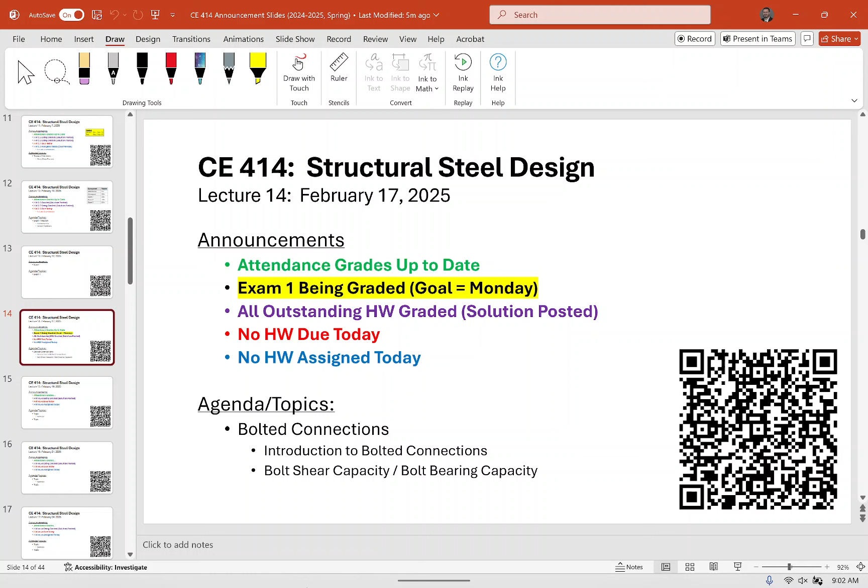So today we're going to talk about bolts. That's our goal for today and for the next 5 lectures: bolted connections. And what we're going to try and review today are 2 limit states related to bolts: bolt shear and bolt bearing.

Let me talk a little bit about bolts, and I brought the bolt assembly with me. I'm going to pass it around if you want to take a look at it. So whenever you see a structural bolt in the field, you will typically see 2 markings on it, okay?

So the first is related to the ASTM specification that it must adhere to. Some very common ones are ASTM A325 and ASTM A490 — those are the 2 most common bolts we use in structural engineering. A490s are a little bit more expensive, but they're also stronger. So the idea is that you pay more per bolt for the 490s, but you can use less of them.

But A325s are probably the most common that you would see in building construction. 490s are probably a little bit more common in bridge construction because of fatigue applications and splices and things like that. These bolts, and the ones being passed around, were made by Nucor, hence the little N logo there.

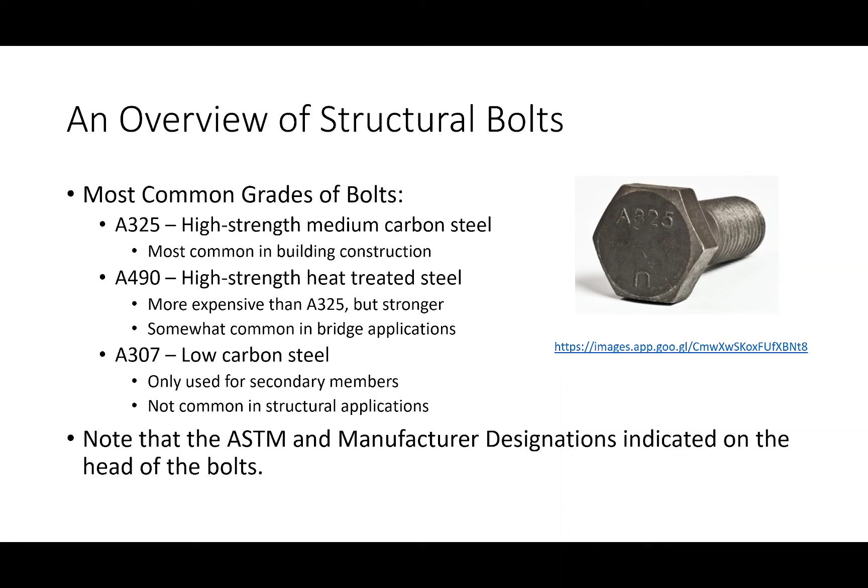Now, I need to preface something right off the bat. These A325 and A490s are the ASTM specifications that those bolts adhere to. I imagine if everybody in here has had CE321, you know what I mean by ASTM specs, because you've used ASTM specs for things like cylinder tests and all that, right? Well, here's the thing: there are other bolts that share the same material characteristics, the same strength properties and things like that, but they follow different ASTM specifications.

So a good example of that are ASTM F1852s. These are what are called twist-off control bolts. We'll talk about this later when we get into the land of slip critical connections, but the idea is that these are really, really common in bridge engineering and in areas where you need to design a slip critical connection. We'll get to what that means here in a bit.

But the idea is that you use this really special wrench, and what it does is it grips both the nut and the bolt on this little splined end. So you don't need, like, think about when you're tightening a bolt, you have a wrench and you're doing that with both hands. You don't need that with a twist-off control bolt, because the single wrench grips both the bolt and the nut all from one end. It twists it, gets the required pretension, and when it hits the required pretension, this little splined end sort of chucks off. So it's great for inspecting bridges in the field and what have you.

Here's the thing: they follow the same strength characteristics, but a different ASTM spec. So what the steel manual does is it breaks these different classes of bolts into groups, okay? The most common ones we'll use are group 120 and group 150. But you'll see in the manual there's also group 144 and group 200 and whatnot.

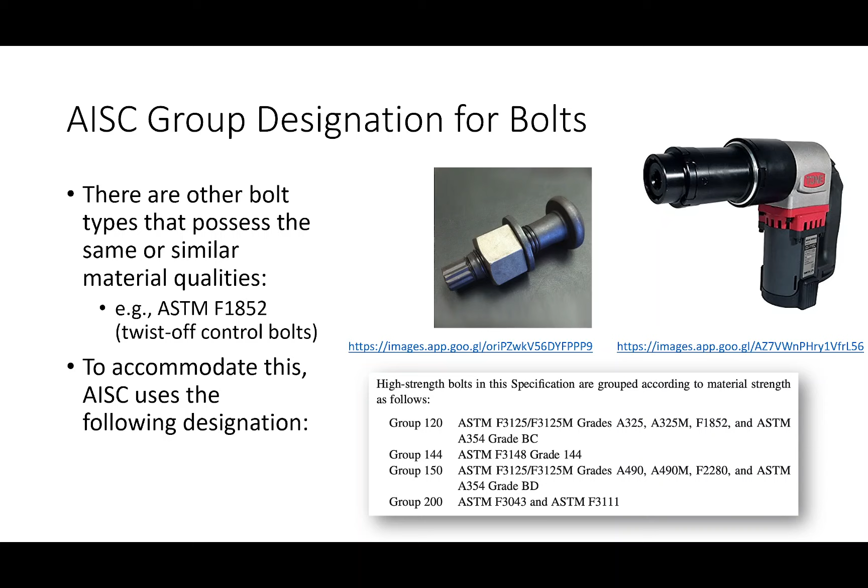Now, in order to explain how we go about analyzing and ultimately designing bolted connections, what we need to do is take a look at what I'll call a bolt assembly. So what I mean by a bolt assembly is we're talking about a bolt, the nut, the washers, and also the two parts that we're joining.

The whole idea behind a bolted connection is you're joining part A to part B. Now, I have a bolt through some plates, and I tighten the nut. What happens to the plates? Here's a plate, bolt goes through them, and I start tightening the bolt. What happens to the plates? They smash together, right?

Once I have this connection together, I can then take this connection and yank on it, apply bending moment, shears, whatever. So what I would propose is that when we're looking at a bolt assembly, we're going to have whatever loads the connection is subjected to that are being applied to it. So we're going to apply some load to it. But we're also going to have, it's kind of hard here on the screen, my apologies, I don't know why it's coming up so faded.

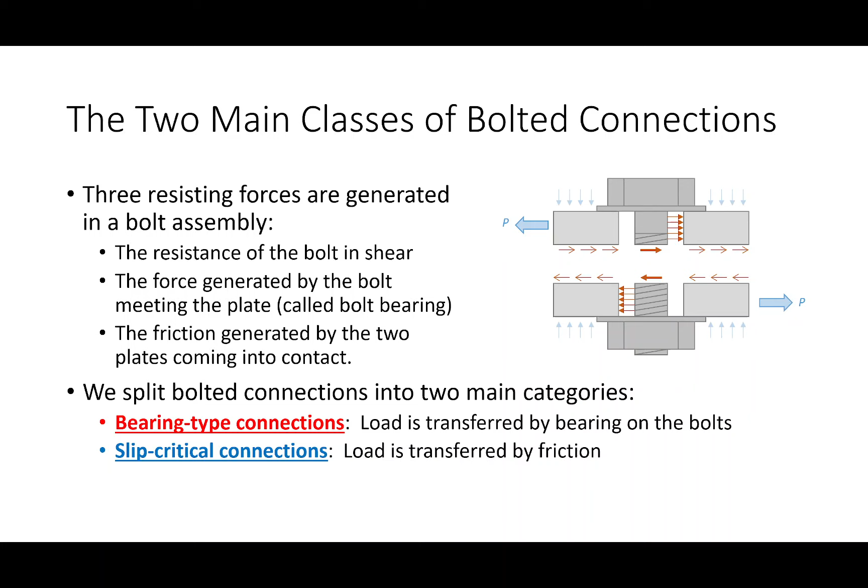So for bearing type connections, we have two different limit states that we really need to assess. We have the failure of the bolt or the failure of the plate. The bolt, in this case, would fail in shear.

The plate can actually fail two different ways, and the best way of describing that is to just show you an image on that a bit later. But for each of these limit states, we're going to have a phi RN. So it's going to be like tension members, where we have a phi PN for gross section yielding and a phi PN for net section fracture. Same idea here: a phi RN for bolt shear, a phi RN for bolt bearing, and we just take the minimum.

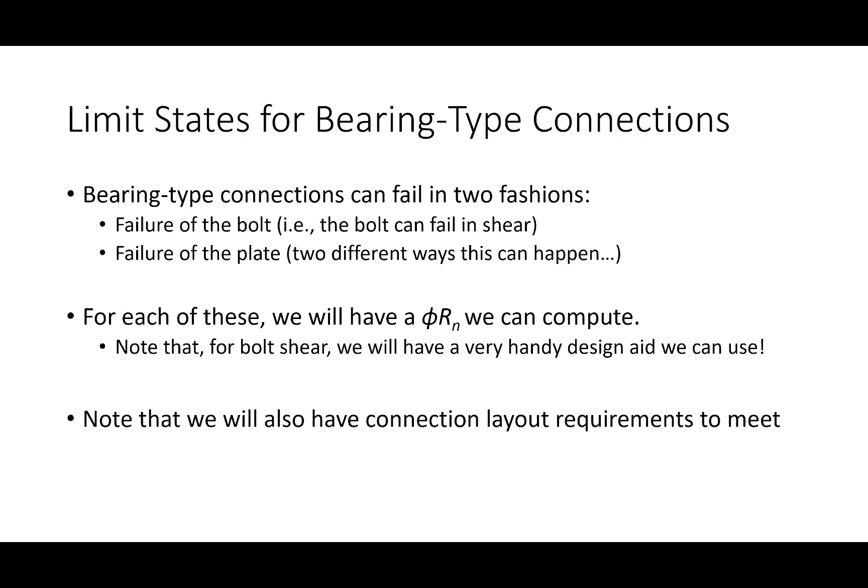Now for bolt shear, we're going to go through the math, but we've got a really handy guide in the manual that's going to make our life a lot easier on that. The other thing, and we're not going to talk about this today, is that we also have connection layout requirements that we have to adhere to. That'll be a topic of discussion for Wednesday, if we're here.

Okay, so let's talk about bolt shear capacity first. What we're concerning ourselves with right now: here's a bolt, and we're loading it in shear. How much load until we just shear the bolt in half? How do we get there?

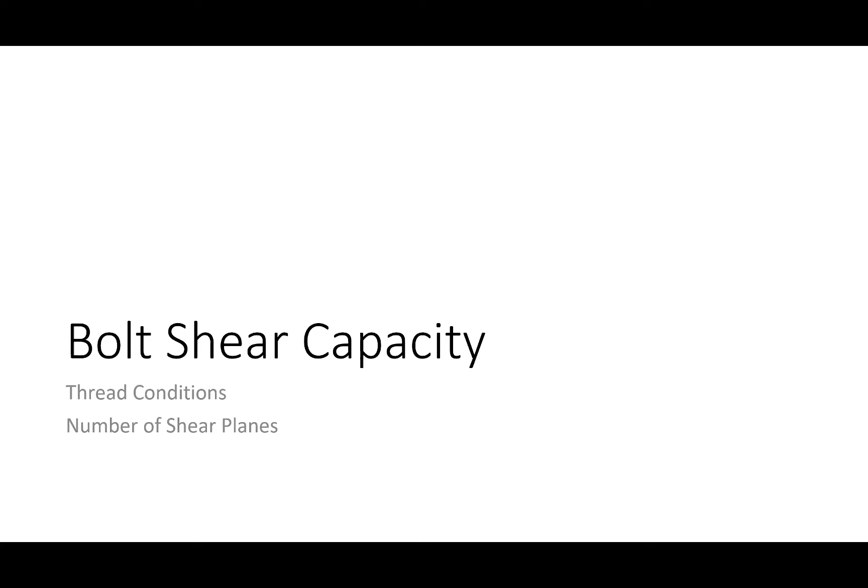We're going to come up with a pretty easy equation to calculate that, but what's going to get tricky are the thread conditions and the number of shear planes. So let's deal with the simple part first. How do we calculate the shear strength of a bolt? Well, we take the nominal shear stress and multiply it by the area of the bolt. By the area, we're talking about the nominal unthreaded area, or the area of the bolt, so pi over 4 d squared.

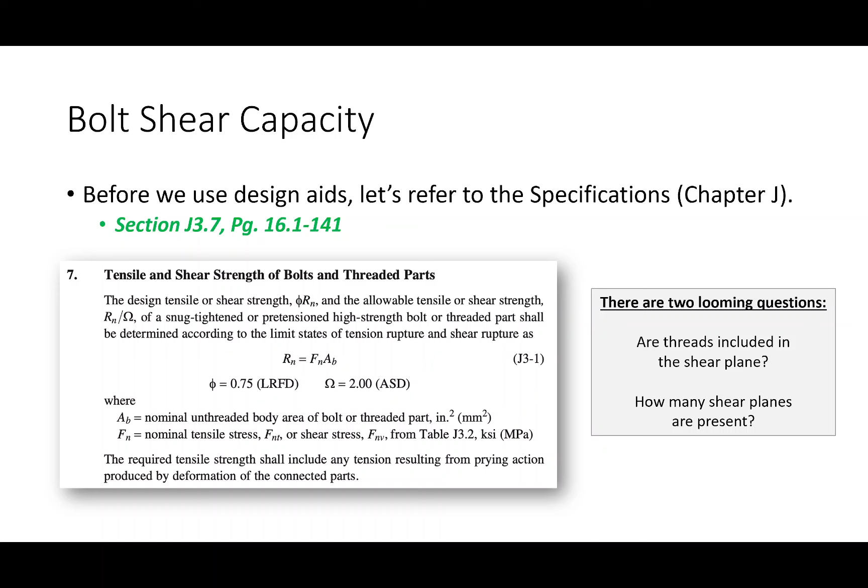Now what's going to make this tricky is, again, the two looming questions: are the threads included in the shear plane, and how many shear planes are present? You're probably not 100% sure what I'm talking about there, but that's why I have pictures.

So here's what I mean when I say the threads are included in the shear plane or not. I've got a plate bolted to another plate, with a bolt going through the two holes, and I yank on them. Now I'm curious, which of these two is weaker, the one on the left or the one on the right? Left. Why? Because it's going through the threads. The threads are weaker, okay?

So we engineers are very creative with our naming schemes. If I had group 120 or 150, I call it group A here. But if I had group A-N, that would be threads included. Group A-X, threads excluded. I'm going to use that notation throughout the next few lectures. So if I say group A-N or group A-X, that's what that N and X means.

Now, by the way, if I didn't tell you whether the threads were included or excluded, what should you do? Do you assume included or assume excluded? You would assume included. Assume the worst. What? Why would you design like that?

That's a great question, actually. So what you're saying is, wouldn't you have control over that? This will become a little bit clearer later, but because design is fairly iterative—where you're changing the members, the connections, the plates, all throughout a given project—at some point it's easier to just make an assumption right off the get-go and then edit later. And I'm saying at the very beginning, that's what you'd want to assume.

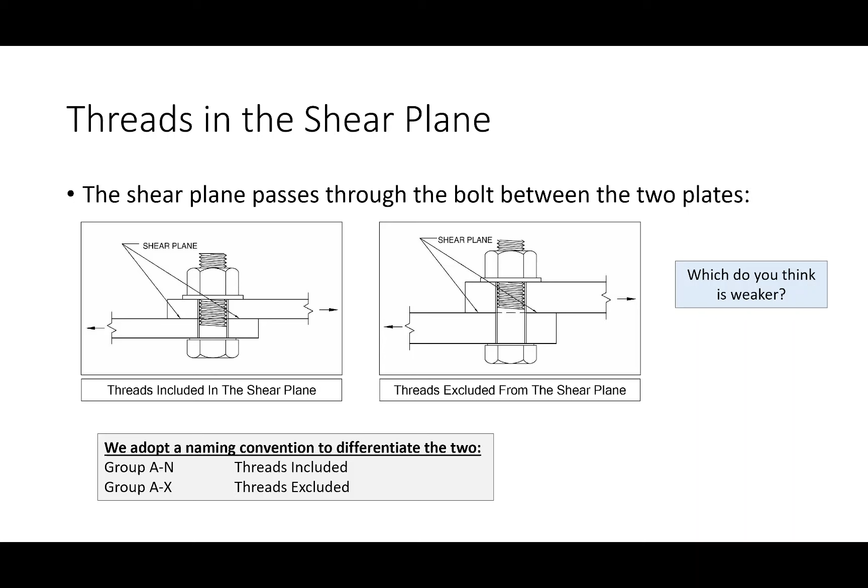That's what I'm saying. The other thing to consider is that you have to also ensure that the bolts are available. In other words, for example, with 3/4 inch bolts, you're going to have some distance here. Is that distance matched up with the plate thickness? You know what I mean?

Now, we're not going to look at this table very much, but we are going to look at it today. So I want everybody to turn to this. This is on 16.1-137. I've got to say, they did a much better job organizing this table in this manual than they did in the last one. That may be a hot take, but I like this table a lot better than the last manual.

So, let's go back to our phi RN.

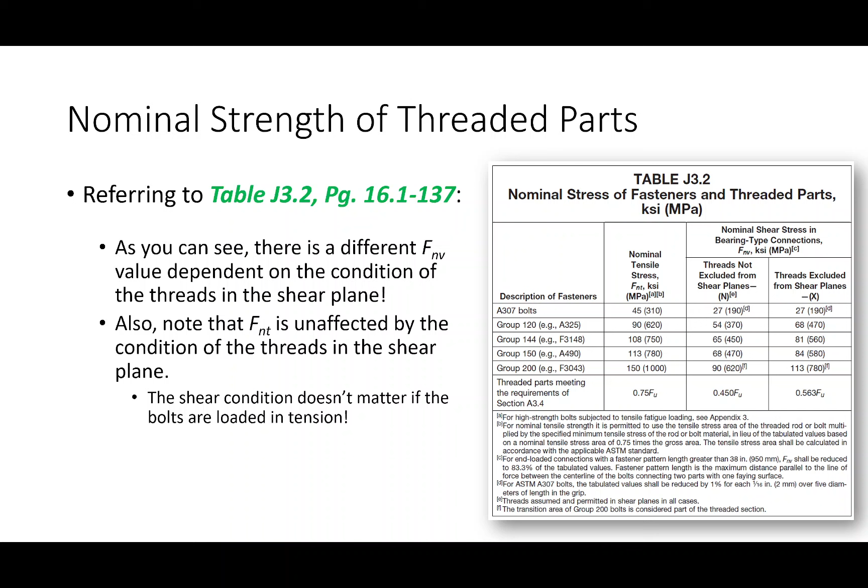Now, I told you we're not going to use this table much anymore. Trust me on that, and you'll see what I mean. But I want you to keep that table open for now, because we're going to do a quick calculation, and then we'll probably hardly look at that table again. You'll see why. I'm getting ahead of myself.

So like I said, there were two questions. Are threads included in the shear planes or excluded from the shear planes? But then the second question is, how many shear planes are there? There could be one shear plane, there could be two, there could be three, there could be 100 of them. But single shear or double shear is the most common.

If you had this bolt in single shear and this bolt in double shear, I propose that its capacity is double that of its partner in single shear. When I say that, I'm talking only about the bolt shear limit state. Now, did the bolt magically get stronger just by being in a different connection? No. What I'm saying is that in order to fail this bolt in shear, I must rip through twice as much material. So the difference between this and this is that I'm multiplying that by 2. The area is getting doubled. Does that make sense?

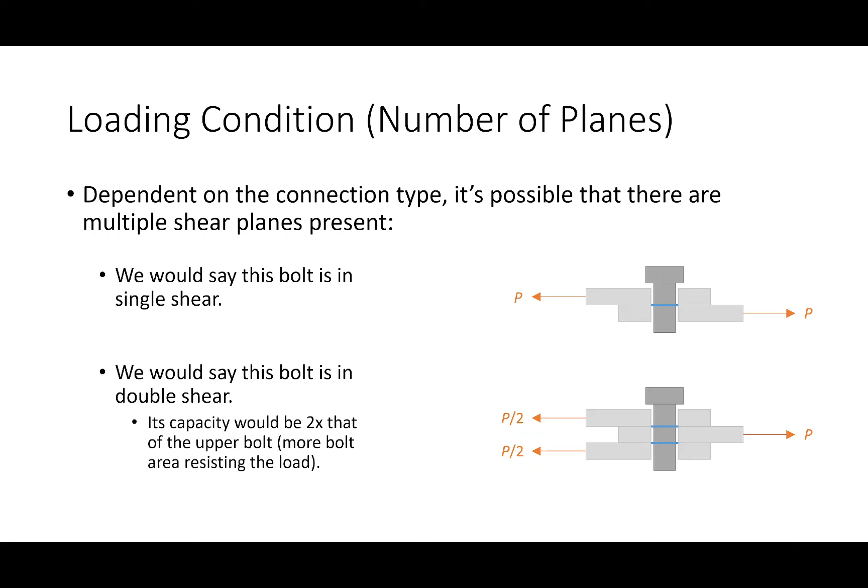Let's practice this. What is the design resistance of a 3/4 inch diameter A325 bolt in single shear, assuming that the threads are excluded? All right, let's walk through this together. This is a really simple problem.

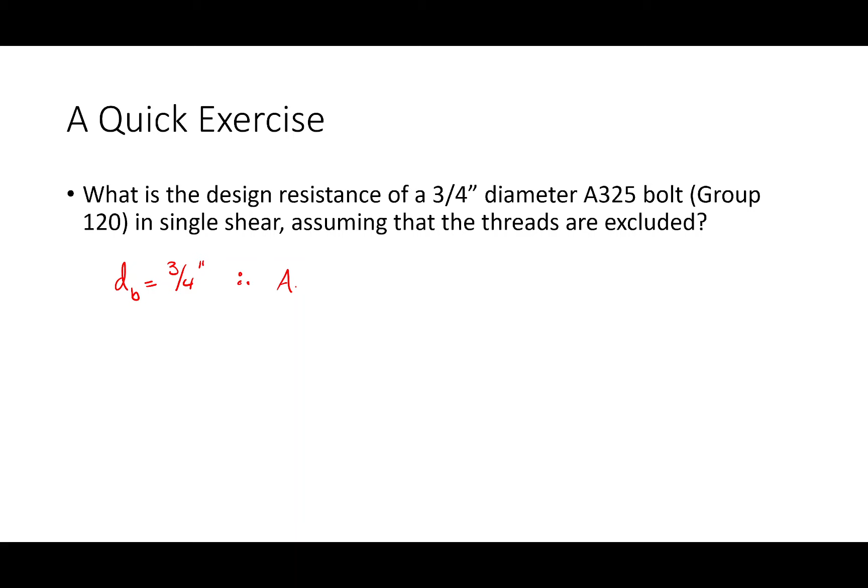So the bolt diameter is 3/4 of an inch. So the bolt area is going to be what? I might need some help on this. That sounds right, 0.442.

Now what about its shear capacity, or its allowable stress? Well, it's group 120. Is it group 120N or 120X? So if that's the case, what is its FNV value? 68. Okay, therefore, its phi RN is going to be this. Now notice I'm using a lowercase r, because I'm going to start throwing that notation out. The lowercase r is going to sort of be a capacity per connector, and then the connection capacity is going to be that times the number of connectors, if that makes sense.

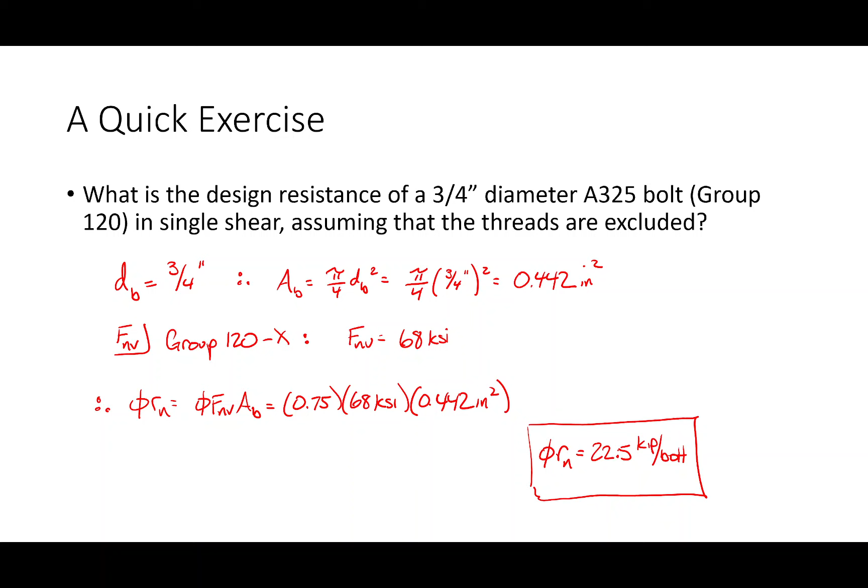So what I would like to turn your attention to now is this. Like I said, this table that we returned to, table J3.2, I said yeah it's nice, but we probably won't use it much anymore. And the reason is because of this.

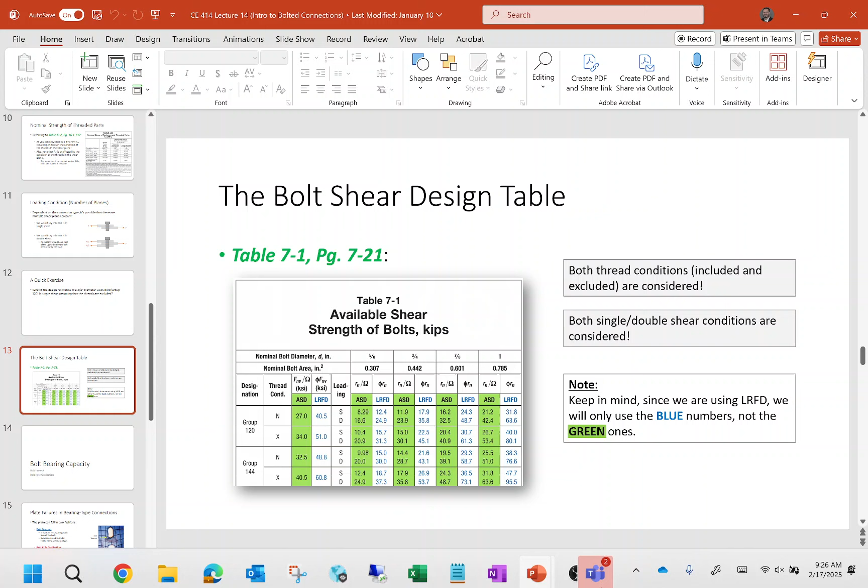This is table 7.1. I want everybody to turn to this. This is a much more important guide than what's back in the spec. By the way, if it's not clear from what I'm intimating, this is one you tab. I would tab this one. That one was already tabbed, see? What did I tell you, it's important.

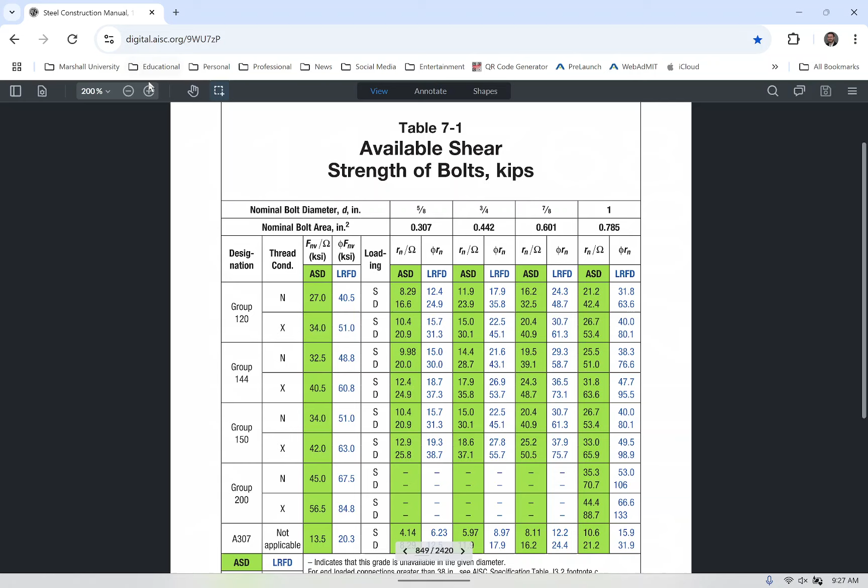For this one-page table, the amount of info baked into it is really kind of nice. How do you use it? Well, it's pretty easy. What did we just look at? What group were we just looking at just now? 120. Okay, thread condition. Okay, was it single shear or double shear? What was the bolt diameter? We'll look at that.

So it takes a lot of repetitive math and just does it for us. Okay.

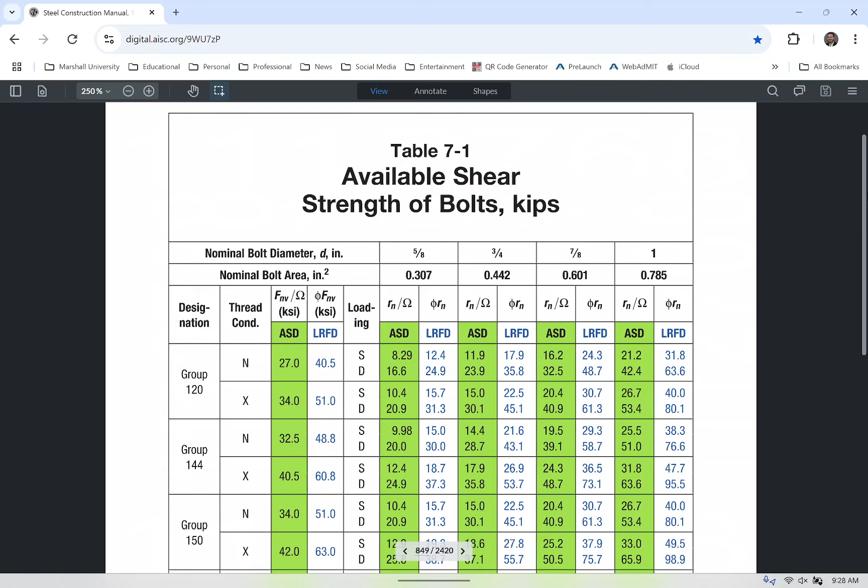So I'll say this, I do want you to kind of understand how to compute the capacity of a bolt in bolt shear, but I'm not really going to ask you to do it, because that's what this is for. So when we start doing bolted connection analysis and design, we're going to make incredibly heavy use of this guy. So have it tabbed, have it noted in your manual. We're going to use it quite a bit. Okay? All right, any questions? And again, we're using the blue numbers, not the green ones.

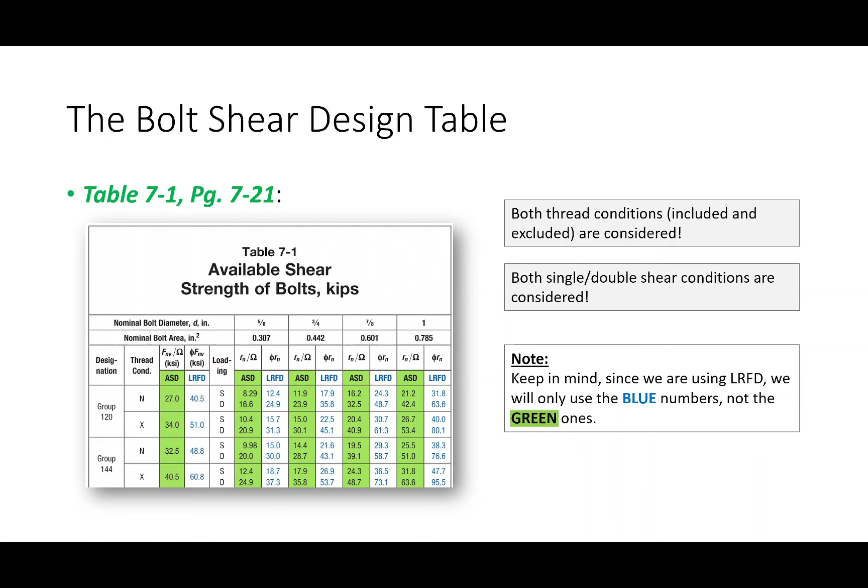All right, so that is the connection, or the capacity of a bolted connection if we're looking at the bolts in shear. Now I want to look at the plate, okay?

So what we've got is a bolt going through the hole, and we're dealing with connections where the bolt comes into contact with the edge of the plate hole and bears on the edge of the plate hole. So how can the plate fail?

I propose that the plate can fail two different ways, and I've called those bolt tear out and bolt hole ovalization. So with bolt hole tear out, what happens is you sort of get this fracture tear along the edge of the hole. The best way of describing bolt tear out is it's sort of like a mini block shear. Instead of ripping a whole chunk out of the connection, we're just talking about tearing the edge of the hole where the bolt's coming into contact. So it's more of a fracture style phenomenon.

Ovalization's a little different. With ovalization, what's happening is the bolt is coming into contact with the plate, and instead of fracturing it, it just sort of plastifies it, goes past yielding and plastifies it, and it sort of mushes the plate up near the hole. You get this sort of hole stretching type effect, and it just sort of mushes up. We call that hole ovalization. The equation that we use for that is very empirical.

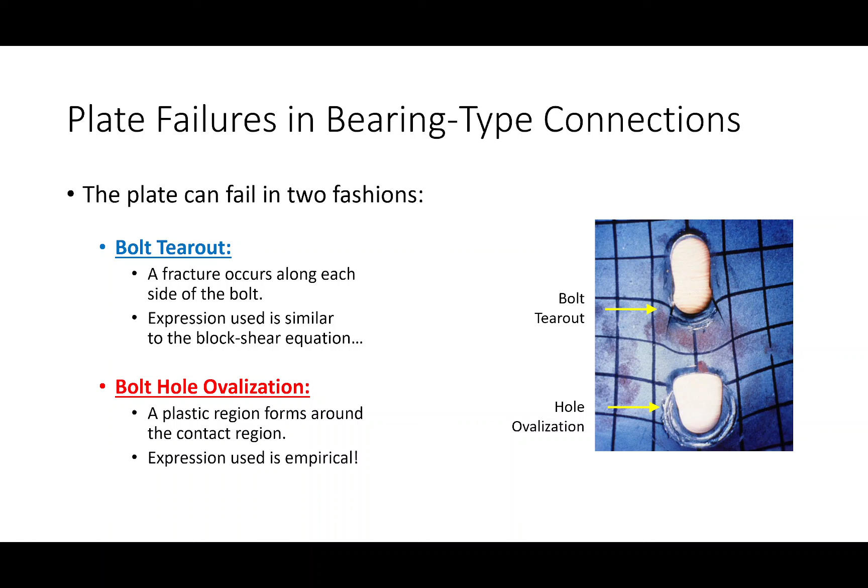But let's get into the details. Now I've got a lot of spec here that I'm going to kind of distill for you. So let me do my best to break this down. We're in Chapter J when we start looking up a lot of the specs here.

So Chapter J has a section on welds, a section on bolts. That's J3. So if we go to the section on bolts, we go to the various different limit states that we're looking at, and go to 11, that's bearing and tear out. We say, okay, let's look at that. We've got oodles and oodles of different things to consider. So we go to 11A, what do we got?

Snug tightened, or pre-tension, high-strength bolted connections. This will make a little more sense when we get into slip critical, but the difference between a slip critical connection and a bearing connection is the degree to which the bolt is tightened. A bearing type connection is just considered snug tight, just regular everyday tightness, nothing with any precision to it. That's where we're starting first.

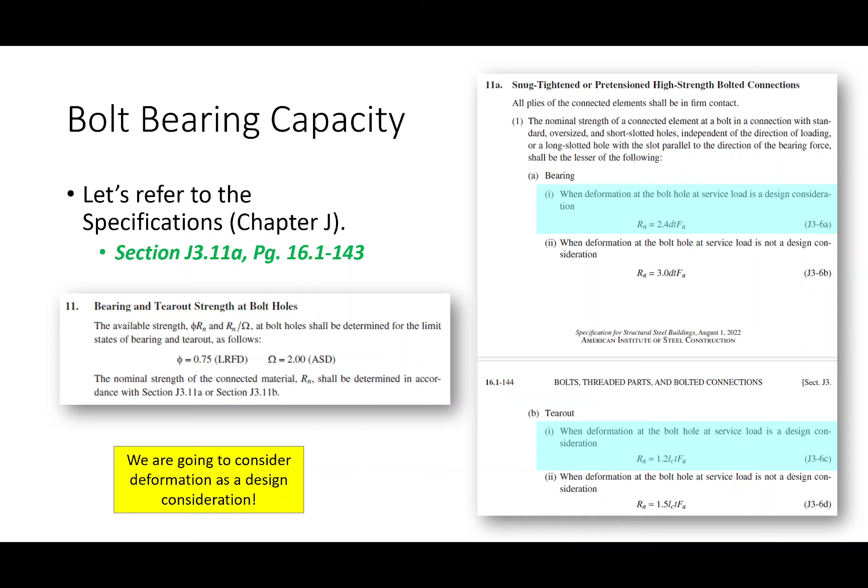When you get into each of these expressions, the manual asks, do you consider deformation at the bolt hole a design consideration? We're going to in here. Most structural engineers that I know do. So we have two limit states, bearing and tear out, or bearing is the ovalization or the tear out. We get these two expressions here, and so that's where this comes from. So that last slide was me just sort of taking the spec, breaking it down. Here's what we've got. Okay.

So our nominal resistance of a bolt according to the bearing limit state, looking at the failure of the plate, is going to be the minimum of these two. Now I've got to imagine that other than one term, everything here you've seen before, right? We've seen a bolt diameter, seen the thickness. The thickness is whatever material the bolt is going through, or if we're talking about the bolt going through this plate or a flange or a web, the thickness is whatever the bolt's going through.

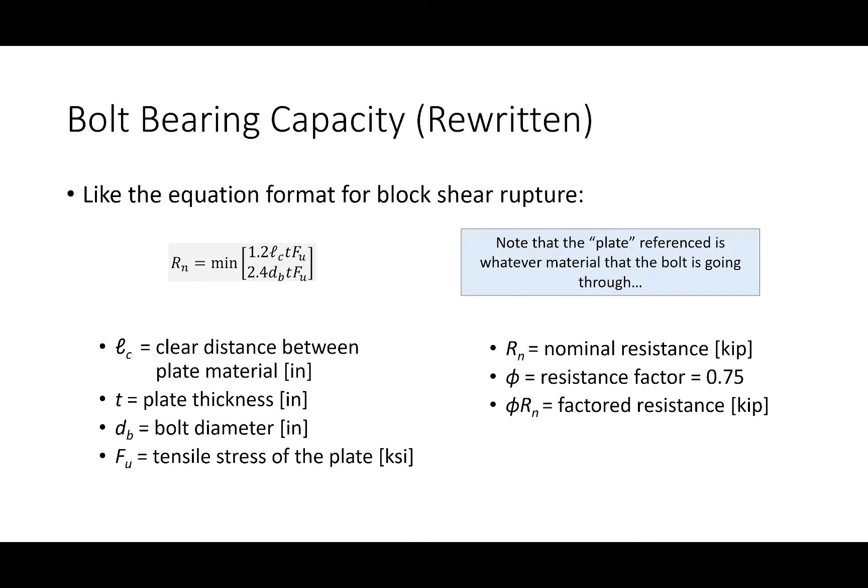Our phi value is 0.75. The one term that's new is this one, LC. That one's different, okay. So let me say this: it's not hard, but it does take some details to go through. But everything else should be pretty straightforward. And by the way, phi, in this case, is 0.75 as well. Okay, all right, with me so far?

So what's the deal with LC? LC is what's called a clear distance. By clear distance, I mean edge of plate to edge of plate. So in the case of this bolt here, I'm talking about this distance, and in the case of this bolt here, I'm talking about this distance.

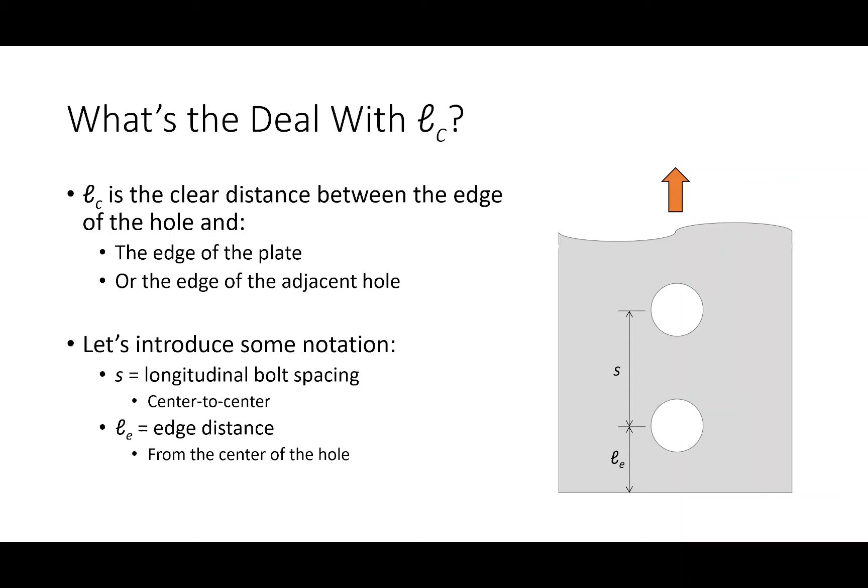By that reason, I need a clear distance for interior bolts and a clear distance for edge bolts, with a different formula for each. How do I calculate LCI? It's the bolt spacing minus a hole diameter, because I go half a hole, half a hole. Does that make sense? For the edge one, I have the edge distance minus a radius, or half a diameter. Fortunately, the edge distances are pretty easy to calculate.

Now, this next part is going to frustrate you, and I'm sorry, but I can't do anything about it. When we were looking at tension members, let's jog our memory: we took the bolt diameter and added 1/8 of an inch. Why? More material... for mistakes.

You're half right. Let me ask it this way: did we add 1/8 of an inch, or did we add 1/16 of an inch twice? What were the two reasons for the 2/16? One was damaged material around the connection. What was the other reason? Clearance—in other words, you have to actually drill the hole a little bit larger than the diameter of the bolt. So here's my point: one of those 1/16 inches was to reflect the actual dimensions of the hole. The other was just a correction to account for the ability to transfer load to the rest of the member, which made sense for tension members.

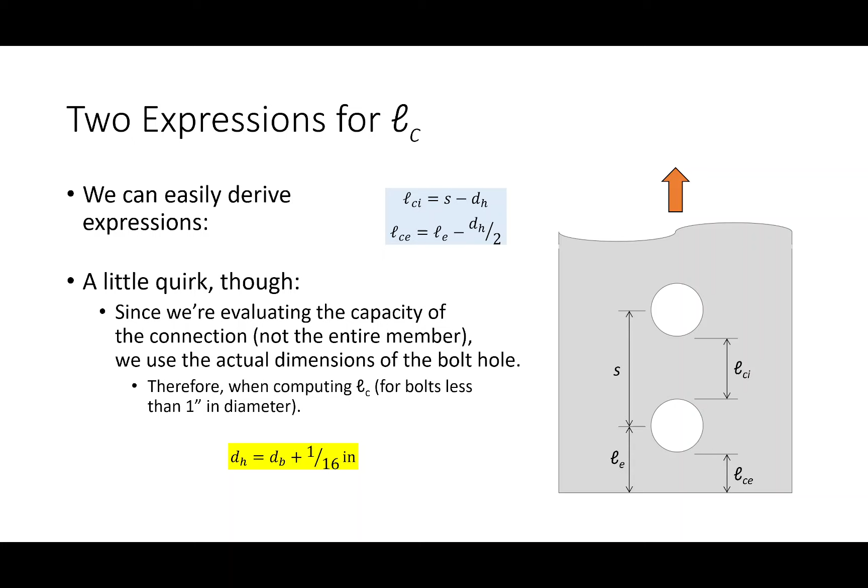We're not looking at tension members right now, we're looking at bolted connections. So in this bolted connection section, we're going to be adding 1/16 of an inch, not 1/8 of an inch. I know, that's annoying, I'm sorry. But yeah, that's a detail you've got to wrap your head around. Don't worry, we'll have some practice on that in a bit.

When I say edge bolts versus interior bolts: edge bolts are sort of the opposite of the lead line. The lead line would have been here, but edge bolts would be ones here, because if we're talking about tear out, they're tearing out this way. So these edge distances are different than all of these.

One final observation: if you go back to this expression looking at bolt tear out and bolt ovalization, you're just taking the minimum of the two. For the tear out, that 1.2 is not a 1.2—it is a 2 times a 0.6.